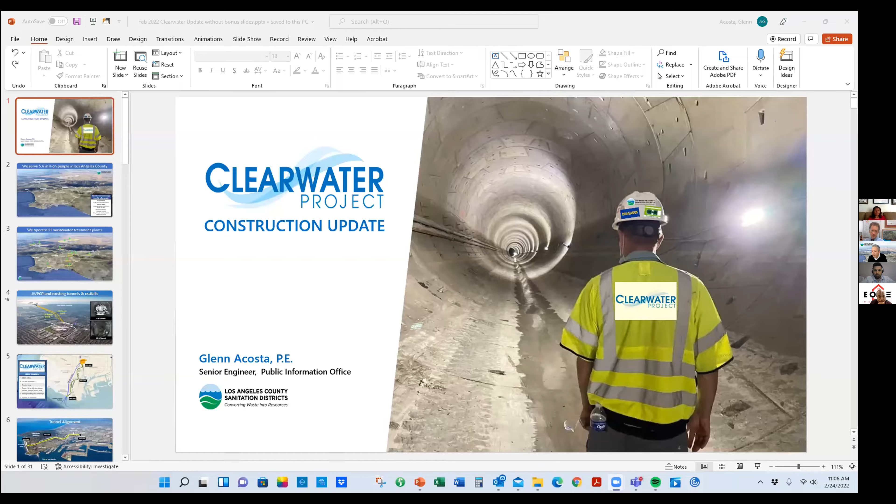Okay, so thank you everyone for having me here today. I'm here to talk about an important infrastructure project. It's the largest construction project that our agency has undertaken in its history, almost 100 years. And it's a very important project for the county. So I thought I would start off with a little bit about who we are, why we're doing the project, and then get into the construction itself and where we are.

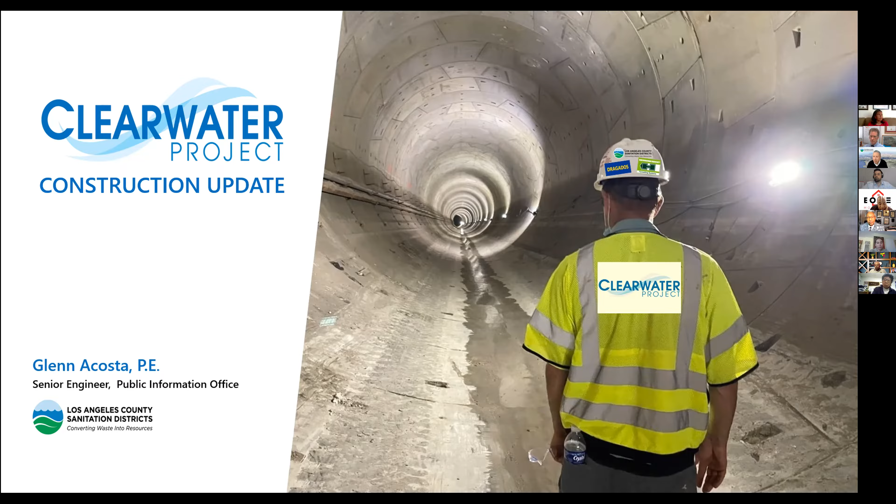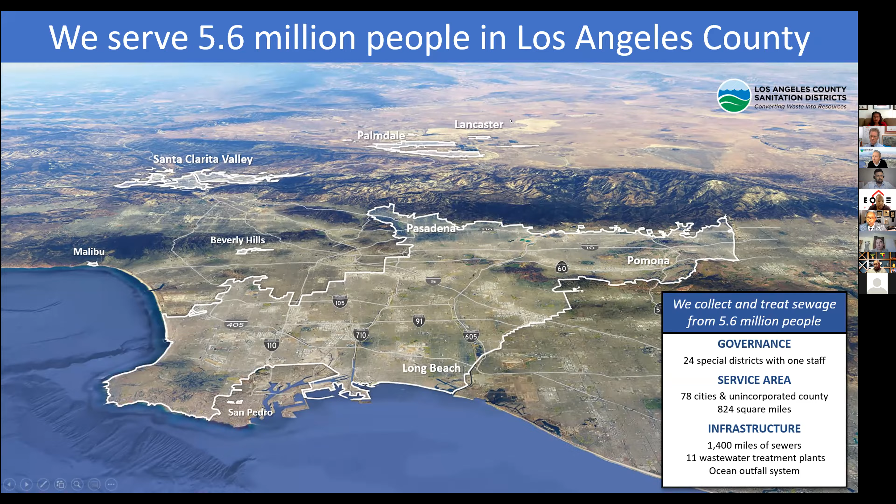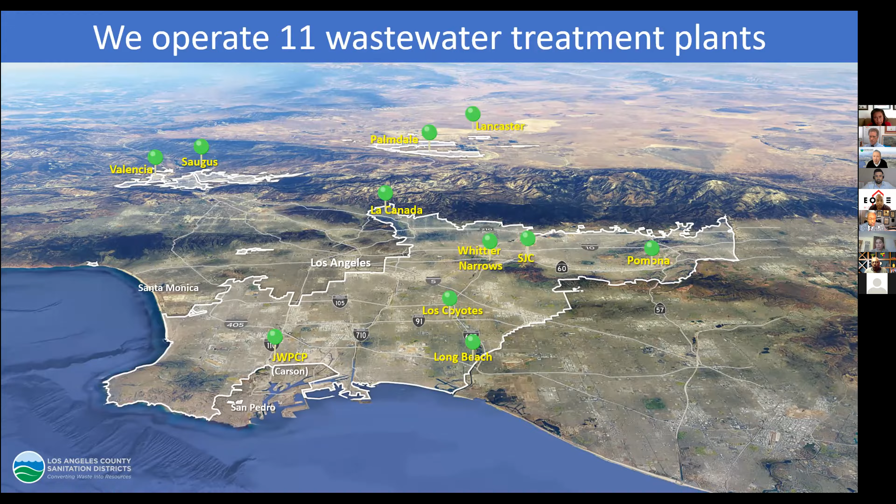So our agency, the LA County Sanitation Districts, manages the sewage for over half the population in LA County, 5.6 million people. Our service area goes from the South Bay all the way to the Antelope Valley. We do that by directing the sewage, or what we call wastewater, to our 11 wastewater treatment plants, shown here in the green pins. The largest plant that we have is in Carson, called the Joint Water Pollution Control Plant. It's by the 110 freeway, and it is the hub of the main sewer system that serves the southern half of the county.

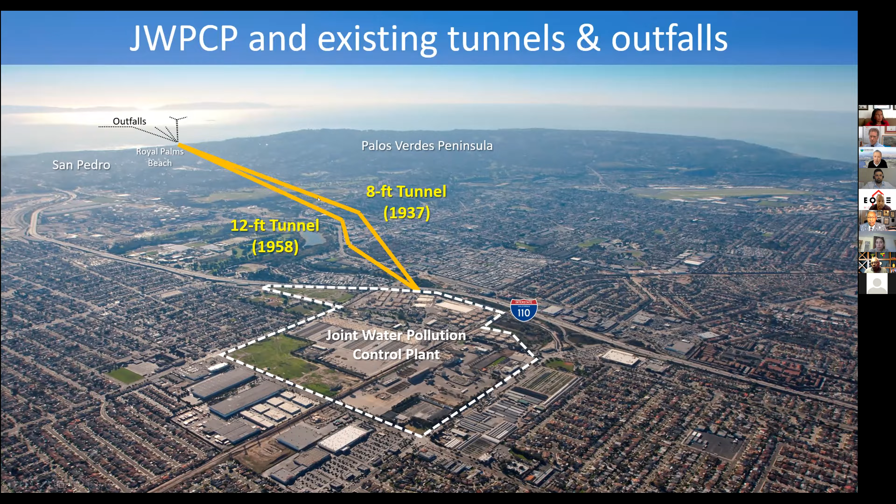Essentially, wastewater comes into the plant, and in less than half a day, it gets turned into clean water, and that clean water goes out to the ocean through 2 tunnels that were built 60 and 80 years ago. And so the Clearwater Project is about addressing this aging infrastructure by building a brand new tunnel.

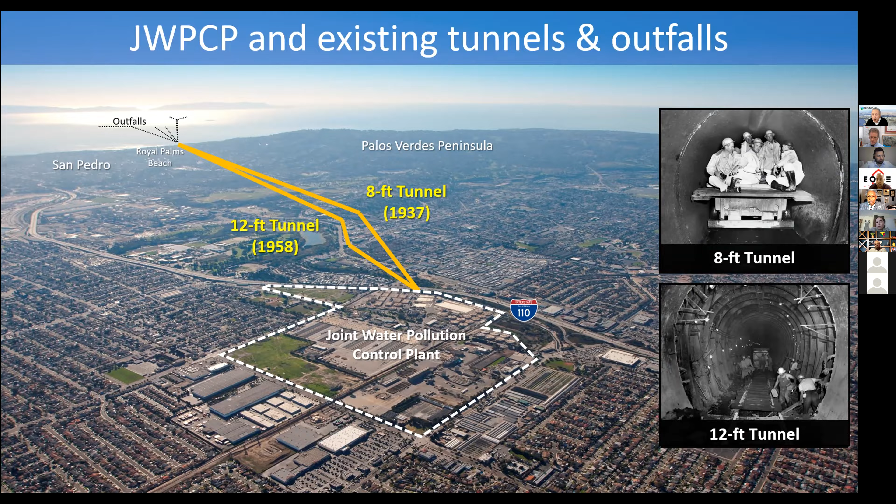If you were to look at the alignment of the existing tunnels shown here in the blue line, it's essentially a straight shot from our plant in Carson to Royal Palms Beach in San Pedro. However, the new tunnel, shown here in the green squiggly line, is not so much that way. It's because when we were doing outreach in the community back in 2006 and beyond, folks in the community wanted us not to go underneath their homes. And so we made the decision to stay underneath the streets and the public right-of-ways. And that's why you see this long squiggly line.

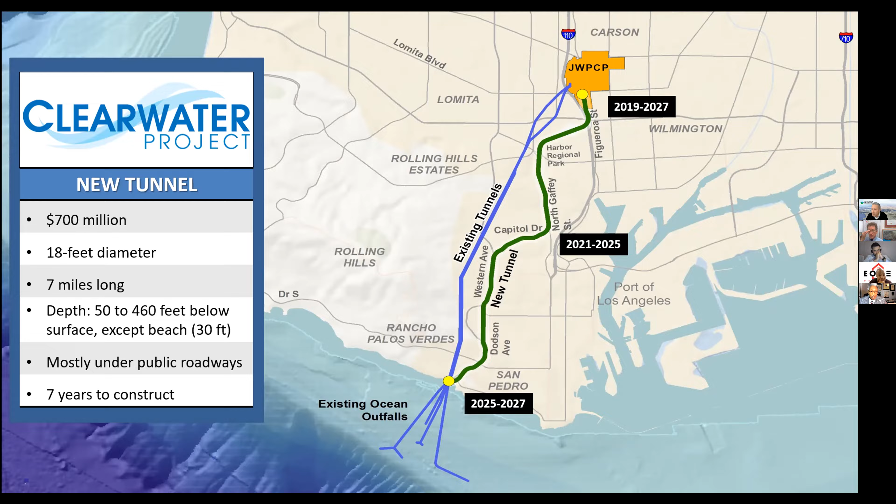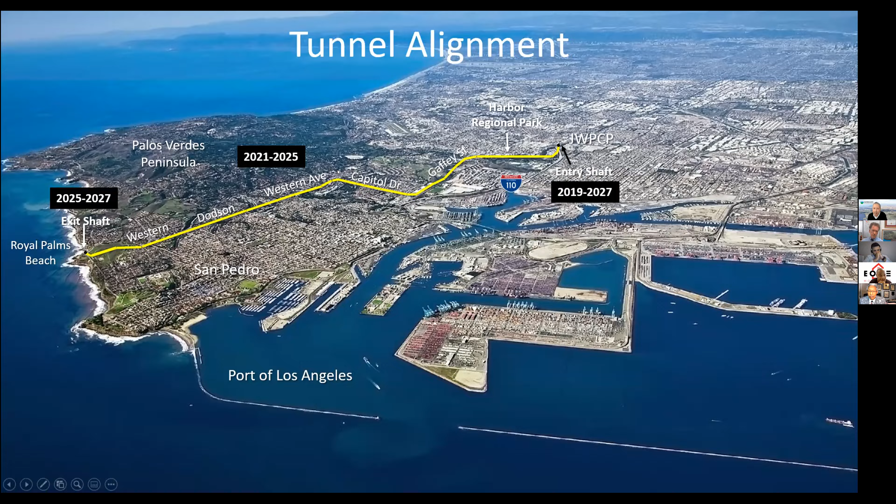So the new tunnel is going to be 7 miles long. It'll be 18 feet as the inside diameter, and it'll take 7 years to build from start to finish. We started construction in 2019. If you were to look at the alignment from an aerial point of view, here it is in the yellow line. We go up underneath Harbor Regional Park, down Gaffey, up Capitol, and then Western, pretty much until we get to the beach.

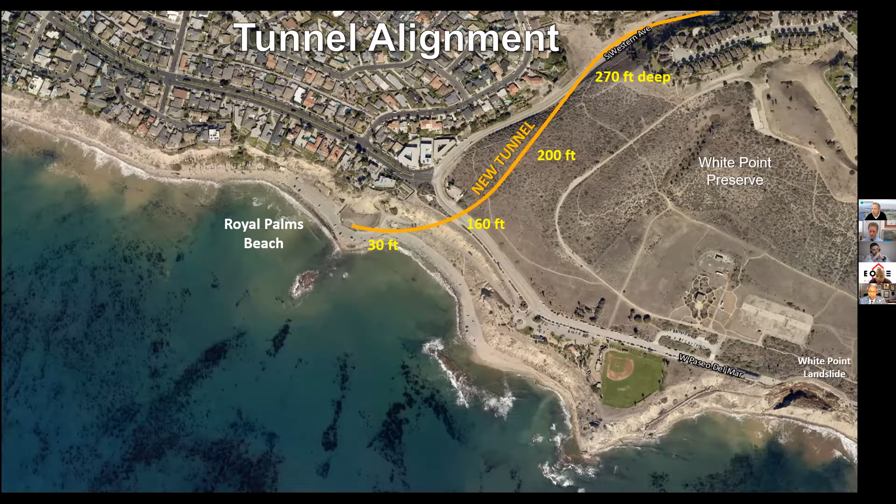And so when we get to the beach, we will be beneath the White Point Preserve, and then we're going to go underneath the bluff, and we'll be 30 feet below the surface. And there we're going to connect to this underground structure that we have right now.

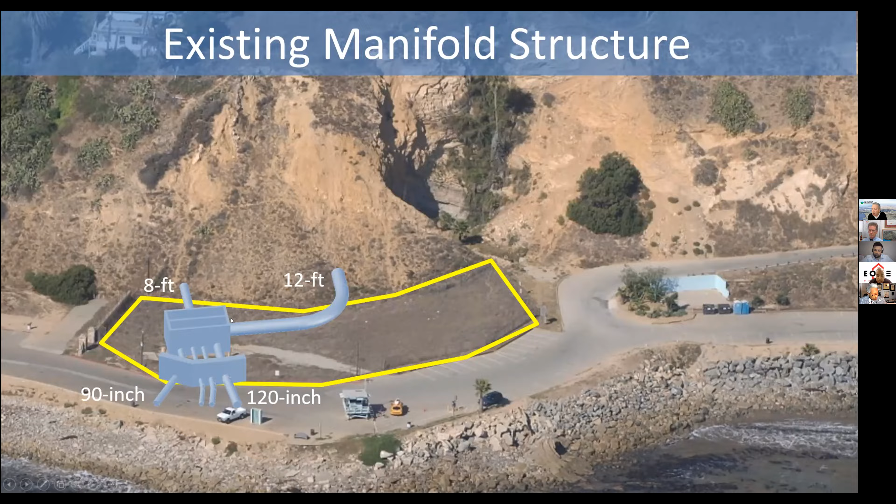It's called a manifold structure. And so we're going to connect to this structure. So this manifold structure right now connects to 2 old tunnels, and it directs the flow to our ocean outfalls. And we have 4 ocean outfalls that follow the bottom of the ocean.

And they're essentially like a large pipe, where at the end of the pipe, you have these holes or ports, and that's where the clean water comes out. So they extend about 1.5 miles offshore and about 200 feet below the water surface. Before I back up.

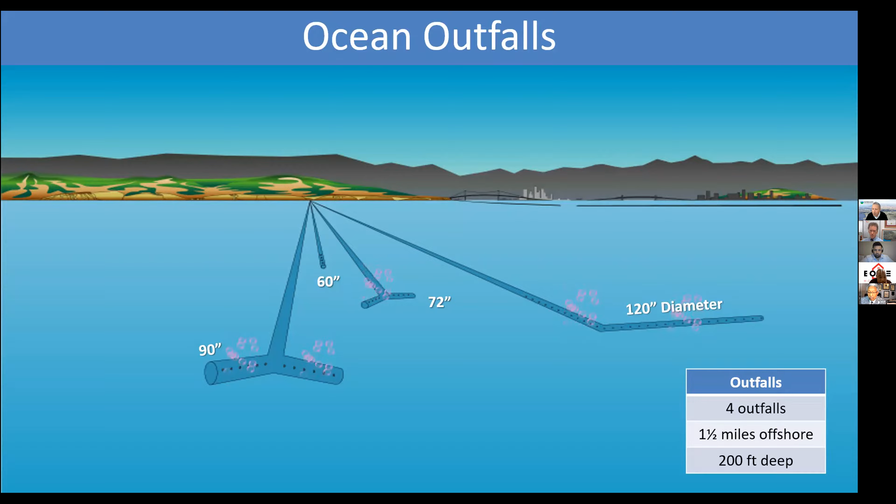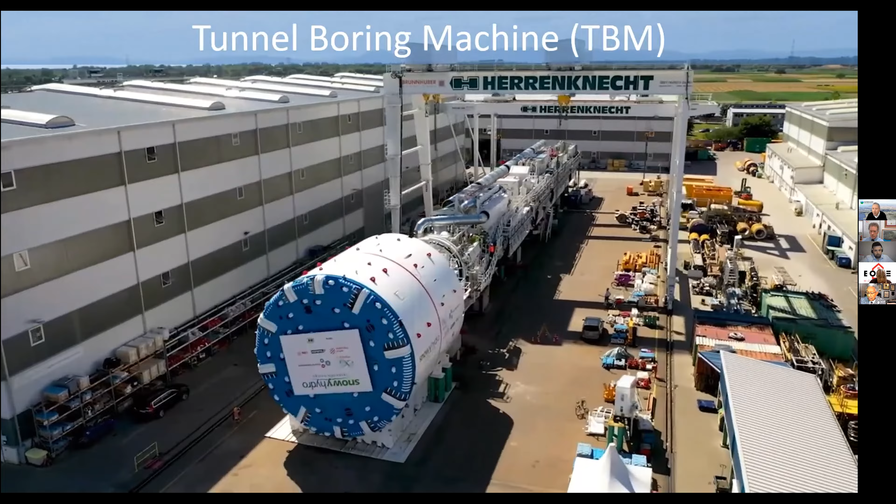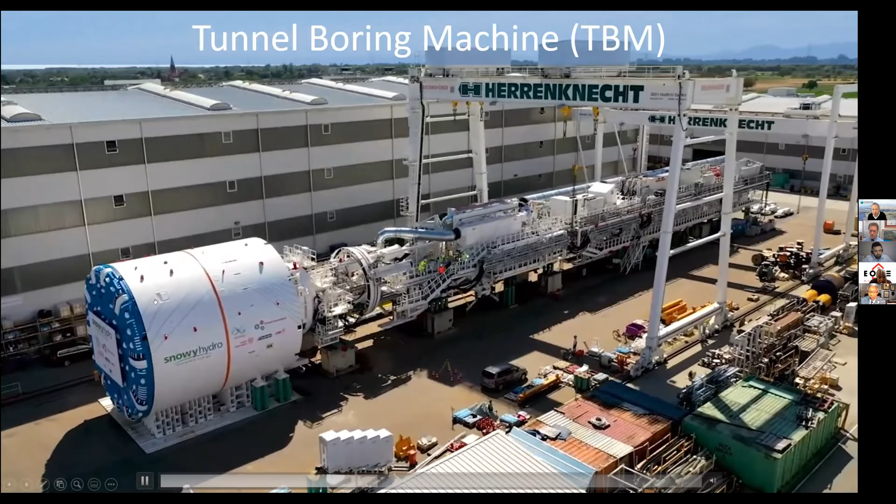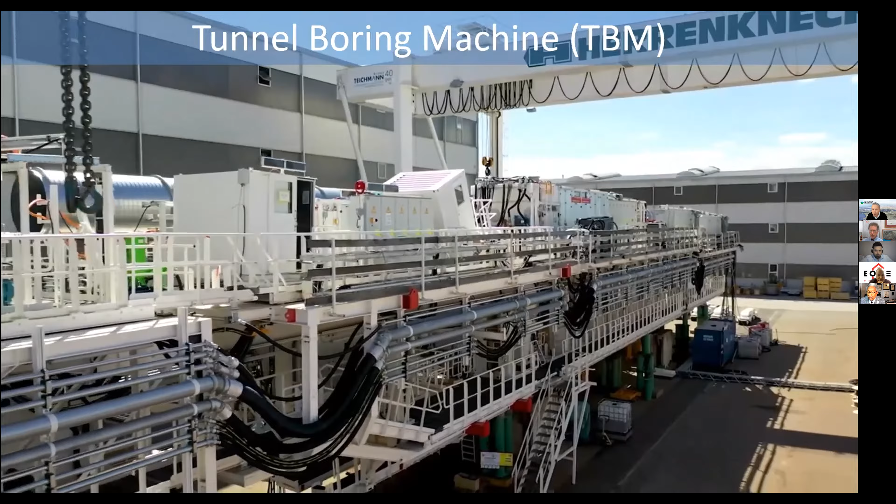And essentially at the front, you have a cutting head that acts like a cheese grater. So it cuts away the rock and soil, and it pushes all that to the back. And attached to this tunneling machine is this long trailing gear. Think of it like a mini city supporting the operation. So pretty much everything you need for the workers to be down there to build the tunnel, that's what we have there. And in our case, this trailing gear is almost 2.5 football fields long.

And right behind the front is an area called the articulating arm, and I'll show you how that works momentarily. So the way this machine works is it goes about 5 feet and it stops. And then we start putting up the walls of the tunnel. And once you complete a ring, it pushes off that ring, goes another 5 feet, and you build some more walls. So essentially this machine builds a tunnel as it digs. And that's one of the beauties of these kinds of machines, because it's very controlled and you're building something as you go.

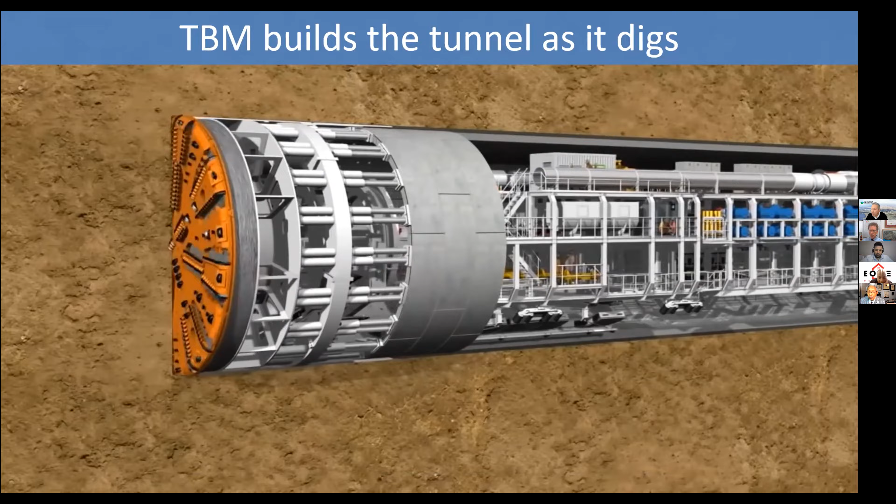So our tunnel boring machine is shown here. It's called Rachel. We had this contest where students across LA County submitted names, and the name that was chosen was Rachel, after Rachel Carson, who was an environmental pioneer that wrote a book many years ago.

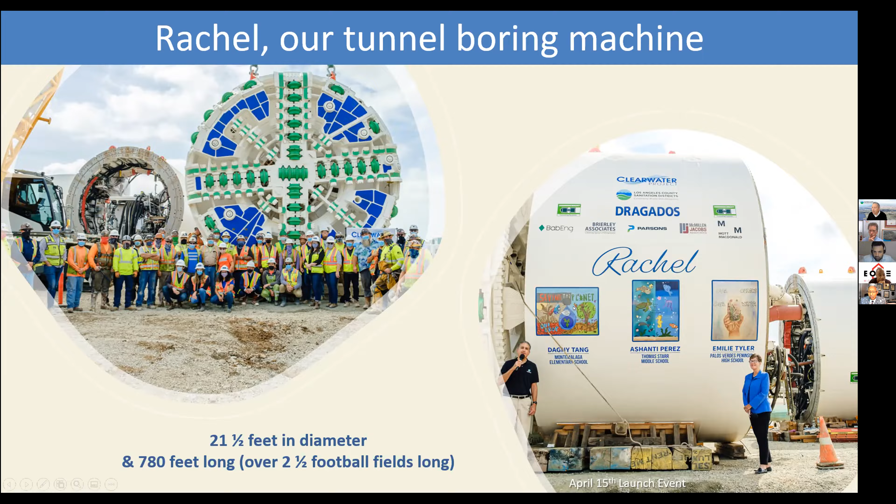And so as you can see, it's a pretty large machine. It's about 2 stories tall, 21.5 feet. And once it's assembled, it's about 2.5 football fields long. We had this ceremony back in April of last year where we revealed the machine to the public. And as you can see on the side, there's artwork there from students who also won a contest for artwork.

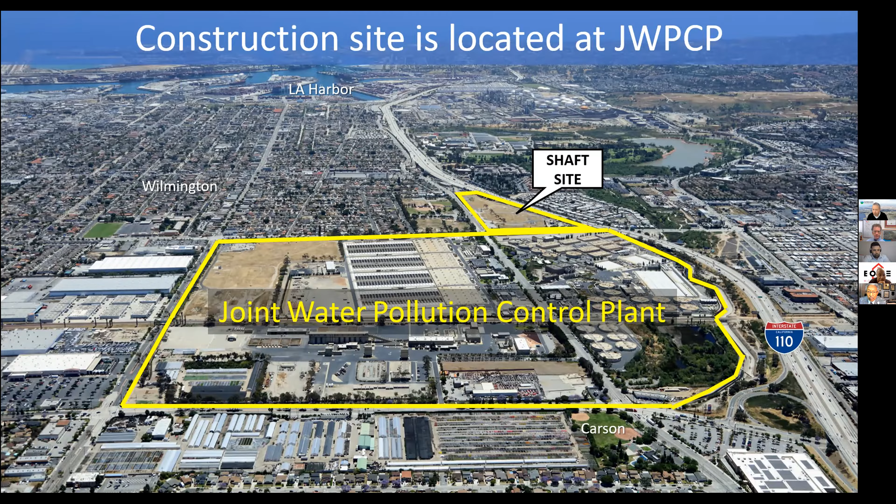So in order to get this machine below ground, we needed to build a shaft. We have this lot that we own next to our plant in Carson by the 110 freeway, and that's where we built a shaft to lower the machine. If you were to fly over that lot back in November of 2020, you would see all the work that was involved in building the shaft.

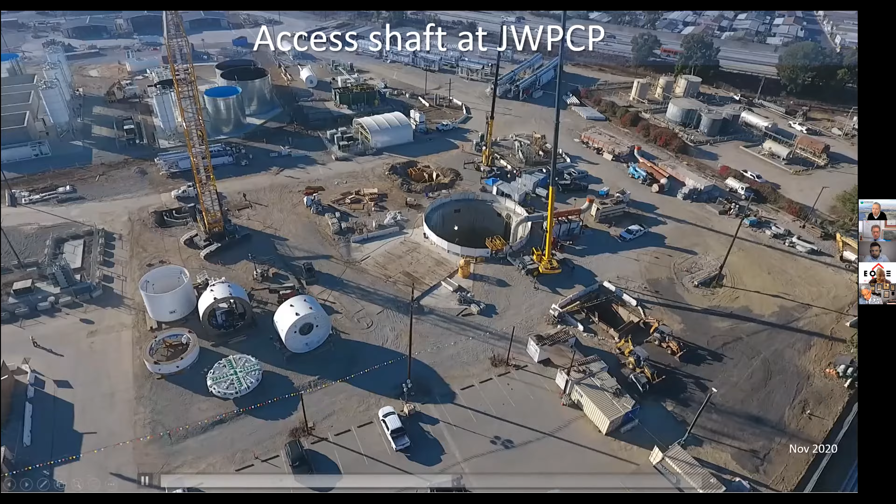This shaft is about 60 feet wide, longer than a school bus, and it's 135 feet deep. So you can stack 3 school buses and it's still not enough. And that's what was built, and it's been done already. The tunnel boring machine, or what we call TBM, arrived in sections. It was built in Germany. It was shipped over by ship and went to the LA harbor. And it took 90 trucks to bring the entire machine from the port all the way down to our lot.

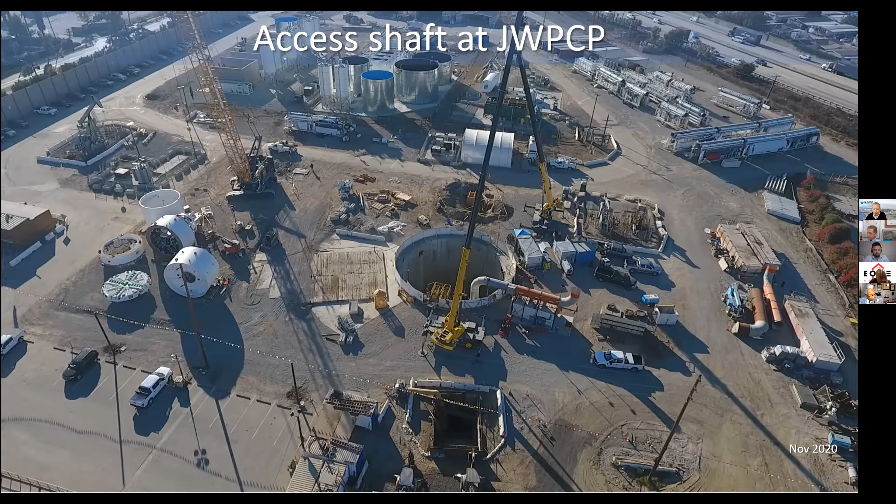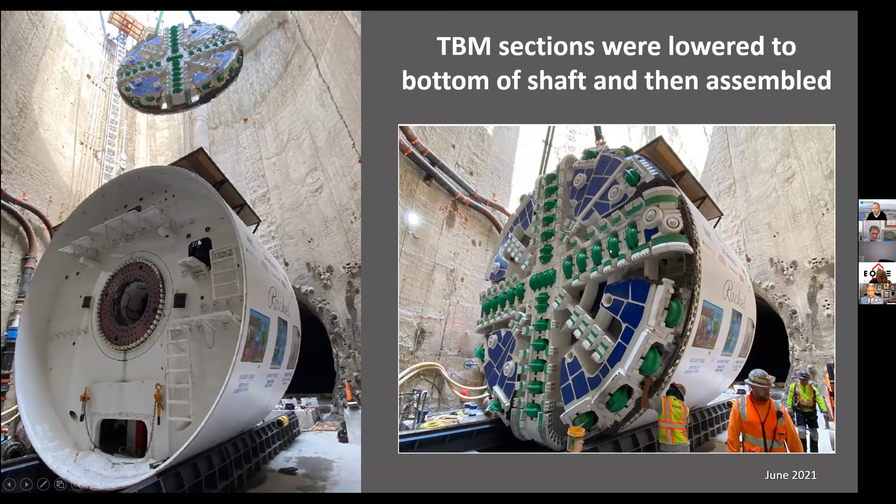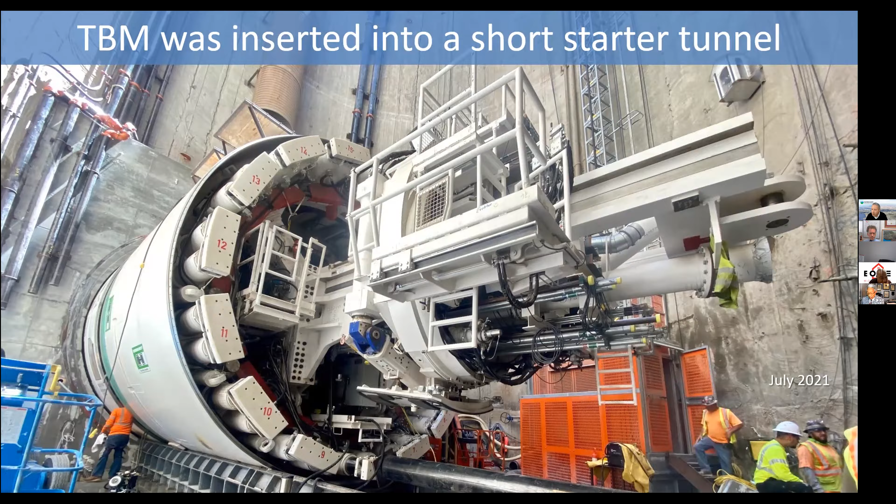So last summer, we began lowering the front section of the tunnel boring machine and started assembling it at the bottom of the shaft. Once the front end was assembled, we inserted it into this short starter tunnel to get ready for tunneling. Once we inserted it, we started testing it, making sure everything was working fine, and then we began tunneling.

Because the trailing gear is over 700 feet long, we had to lower it in sections. Here's a gantry of that being lowered. So as the machine advances, we start adding the trailing gear as it goes.

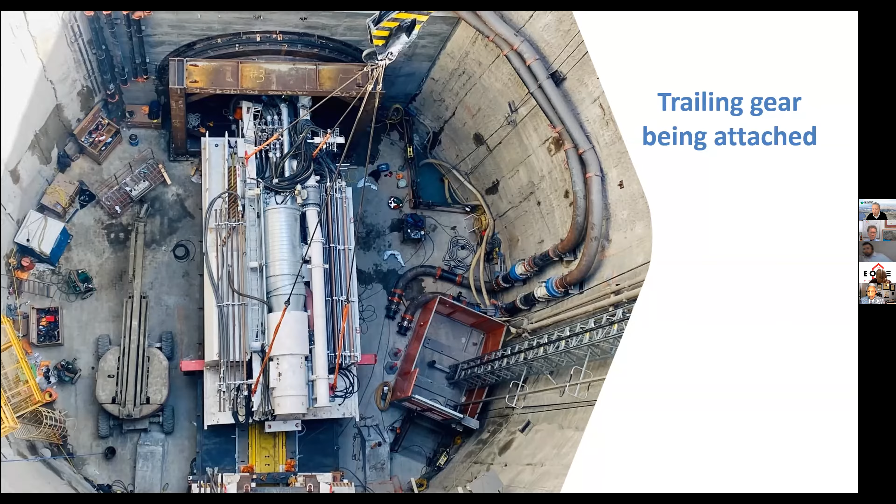So in October of last year, we started building the tunnel, and this is the first few feet of tunnel that were built. And here's the machine. So since then, we've built about 700 feet of tunnel thus far.

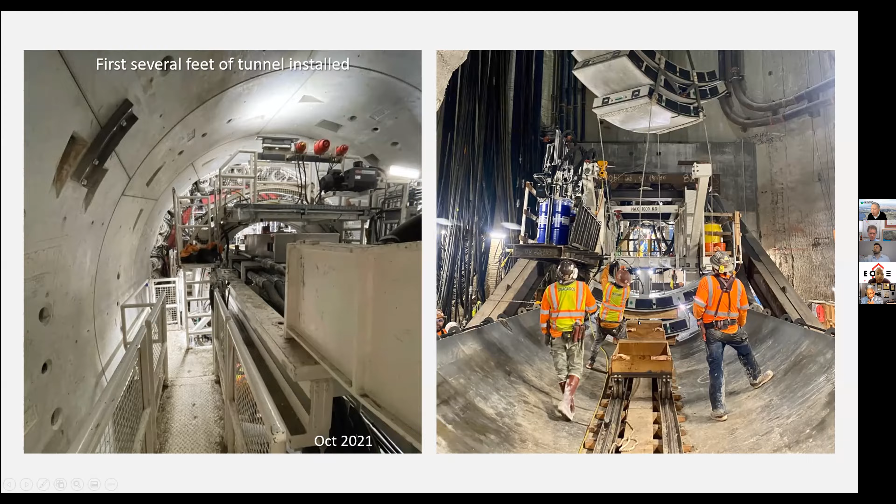And so back then we were lowering the tunnel wall sections below, and they would put the sections on a cart and then take it to the front of the machine. But since we have 7 miles of tunnel, it's not really efficient to have the guys push carts up and down the tunnel, right? So we have this locomotive that we lowered into the shaft. And so that locomotive will be loaded with the wall segments and brought back and forth from the shaft to where the machine is at.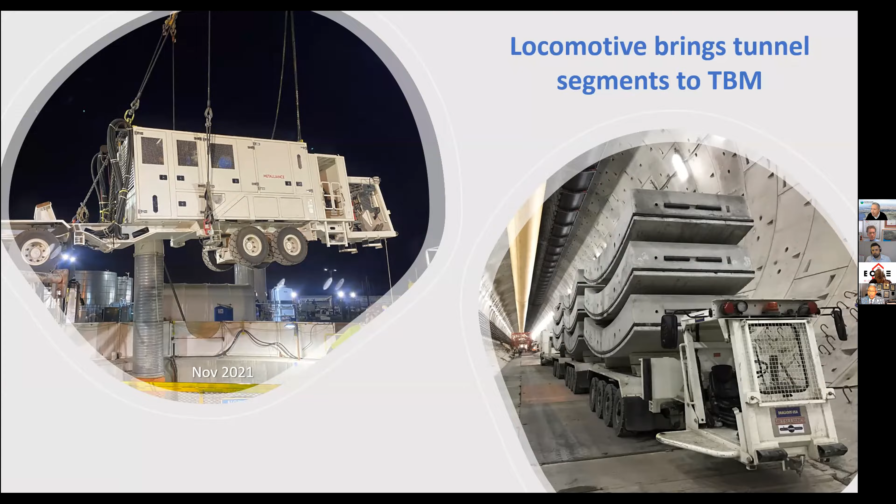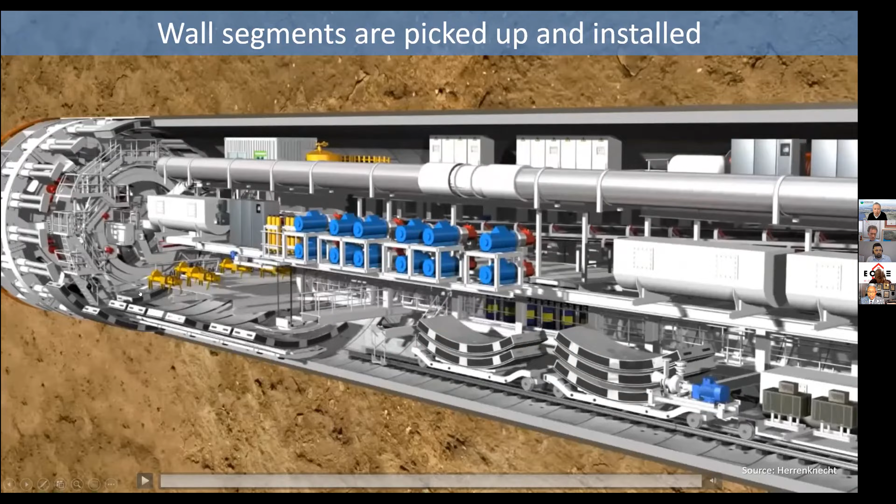And so all the soil that's excavated from tunneling will come out of that shaft in Carson. All the personnel, all the wall segments will go into the same shaft. So what happens is the wall segments are brought forward by the locomotive. It's taken to near the front of the machine. And so the wall segments are put on a feeder, and then that feeder slowly makes its way to the articulating arm. And there's an operator there that picks up the wall segments and puts it up and starts making that ring.

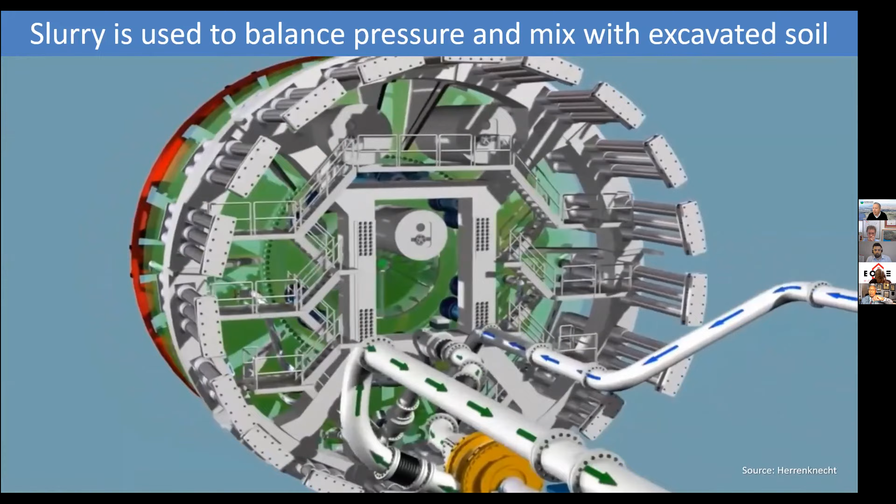So our tunnel boring machine is called a slurry machine because in order to balance the forces that the machine sees underground, we put water and clay or bentonite slurry behind the cutting head. And so that balances the pressure that it sees on the outside. And so that slurry gets pumped in, and then it gets pumped out from the shaft and taken to this slurry treatment plant that we have on site.

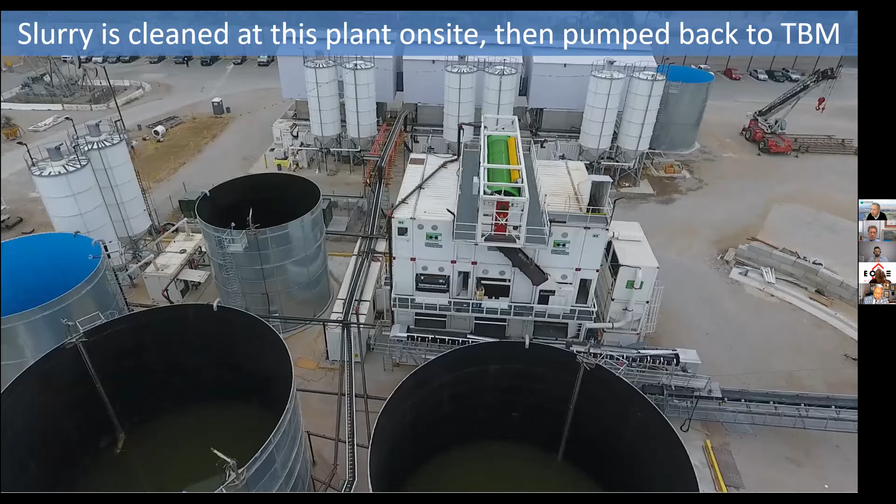And what it does is it cleans up the slurry, removes all the rock and soil, and then it gets recycled back to the machine. So it gets pumped back down the shaft and all the way to where the machine is at. So we're recycling the slurry.

So, we have 7 miles of tunneling. And so you have these cutting discs in the front that cut away the rock and soil. So at some point they wear out. And so they need to be replaced or repaired. So how do you do that when the entire route is beneath the water table?

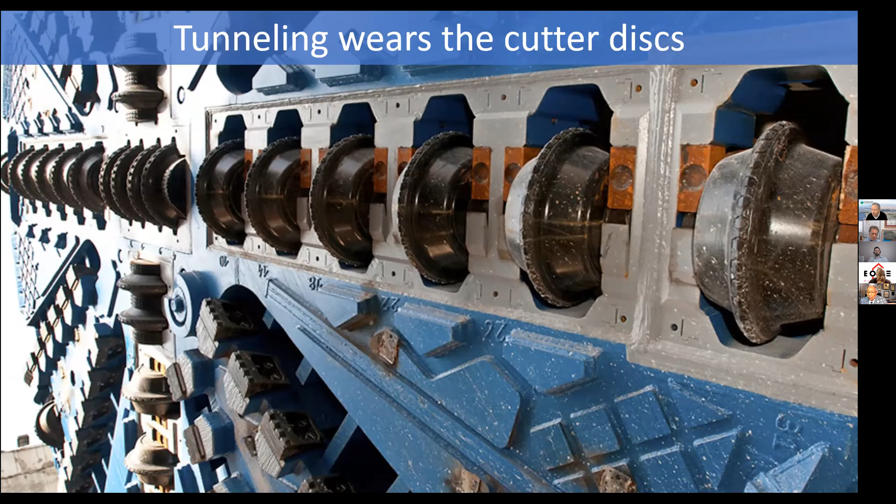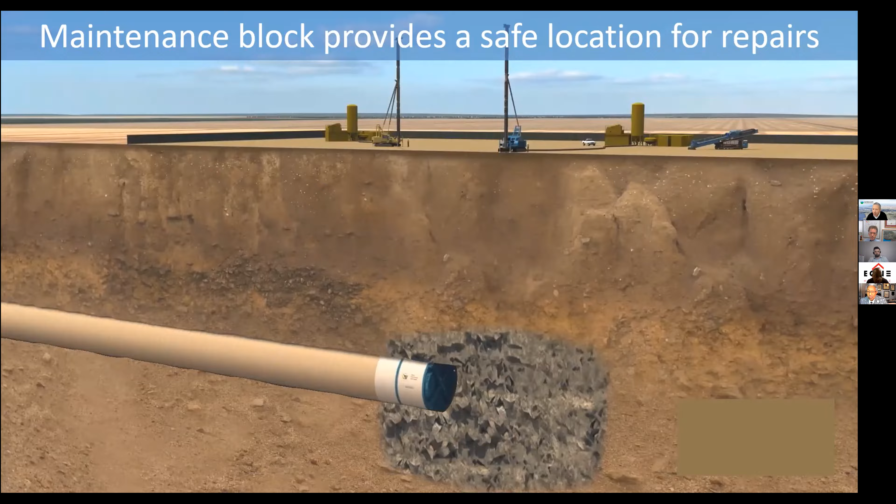Well, what we do is at certain points along the alignment, we inject this concrete grout below ground, and we create this big block of concrete so that when the machine gets there, it bores partway through and it stops. And so now you have a dry, clean environment for the workers to access the disc and make the repairs. And so we built 3 different maintenance blocks, as we call it.

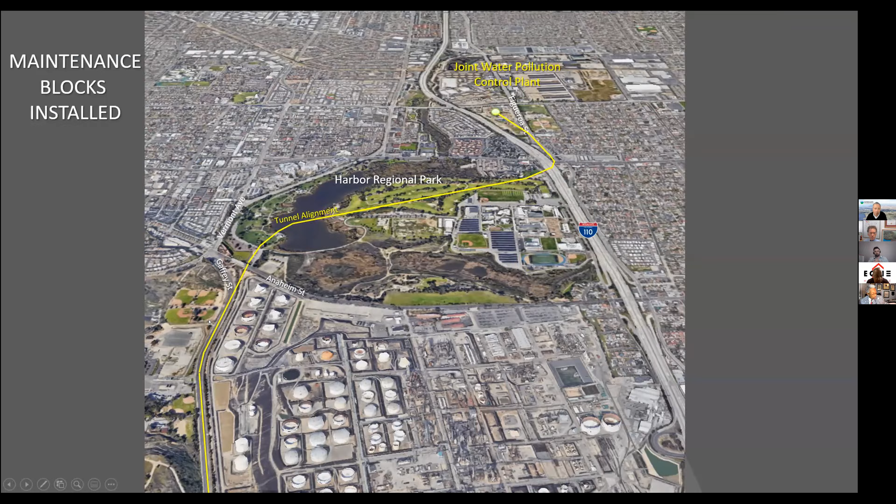And so here the yellow line shows the alignment of the tunnel. And so the first maintenance block is at the north end of Harbor Regional Park. The second block was created at the south end. And the third maintenance block was put in on Gaffey.

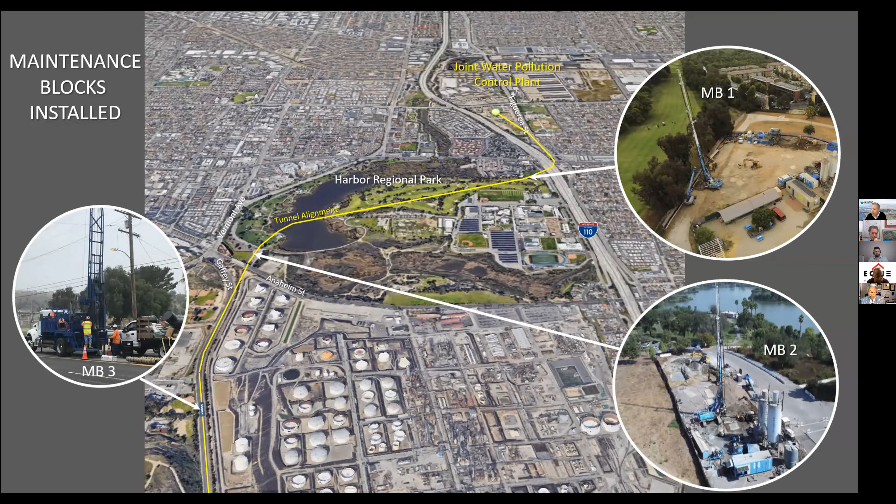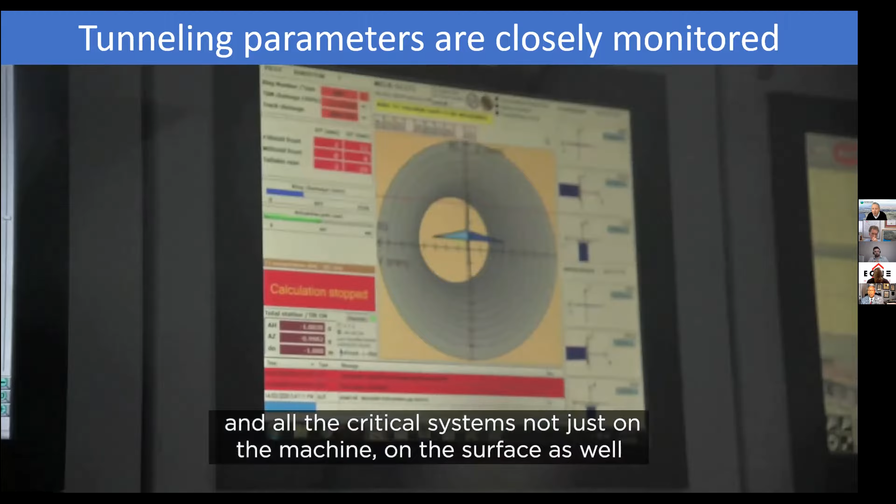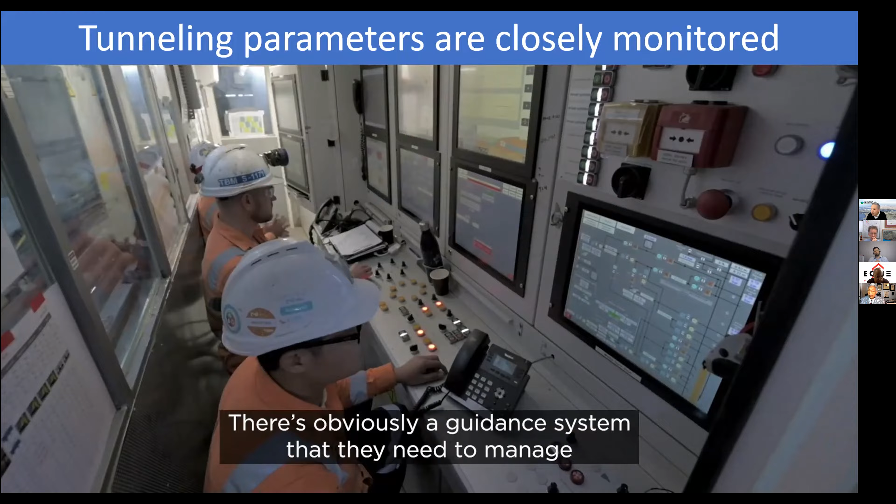So when you go inside one of these tunnel boring machines and you go to the control room, you'll see that pretty much everything that's important to be monitored is monitored. And that basically creates a nice, safe, and controlled way of tunneling. But because we're engineers and we've done tunneling, we have tunneling experts on our team. We also, as an additional safeguard, put in sensors at street level to monitor for any noise or vibration.

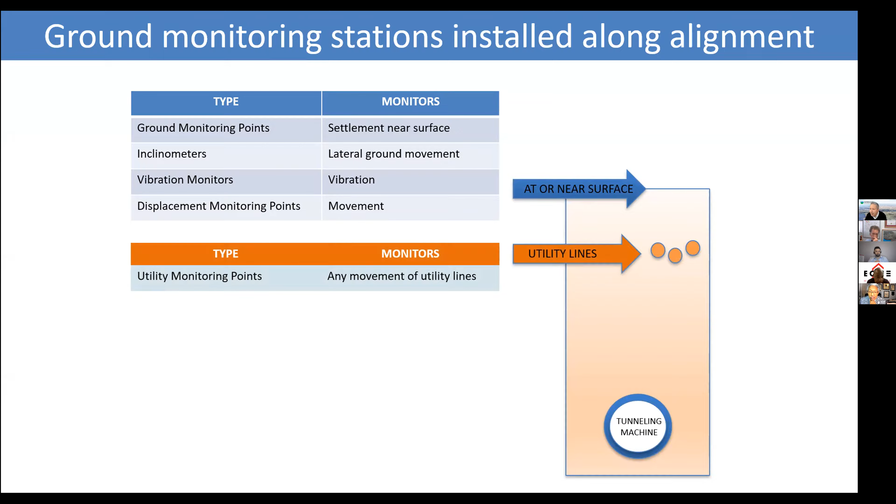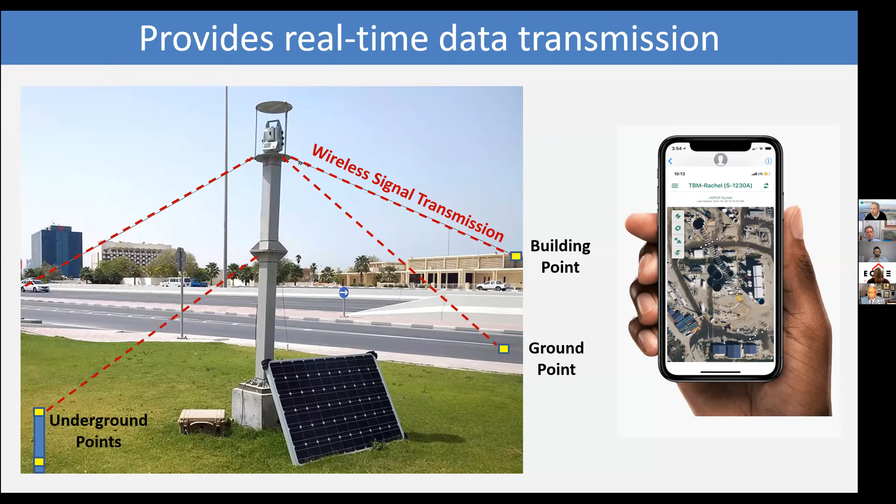And we also have monitors that attach to the gas lines, the water lines, to make sure that they don't move. And we also have sensors that go all the way down to where the machine is at. So all these things are monitored real time. And all these signals are sent to a phone app and the TBM itself, so that you can see real time what's occurring, and you can make any adjustments to the machine that are needed. And so it's a very sophisticated process for building tunnels nowadays.

So we install these sensors, and here's the installation that occurred on Gaffey. And so for the deeper sensors, we use a small drill rig. For the ones near the surface, we can actually vacuum out the pavement and put those sensors in there that way.

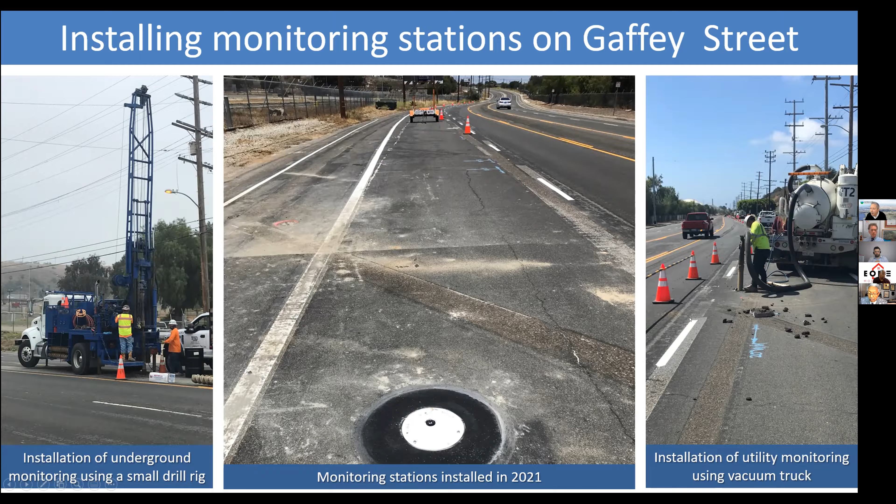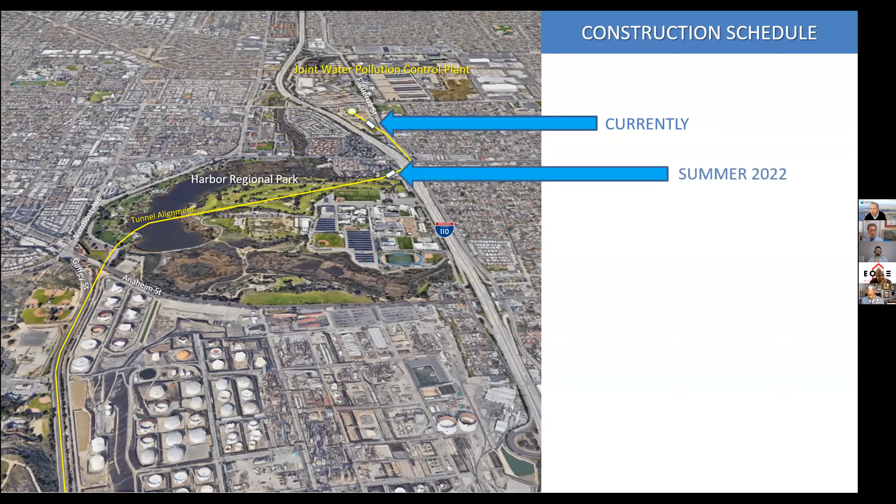So where are we today? So the machine is about to go on Figueroa. And this summer, it should be at the north end of Harbor Regional Park. And by later this year, we should reach the south end of the park.

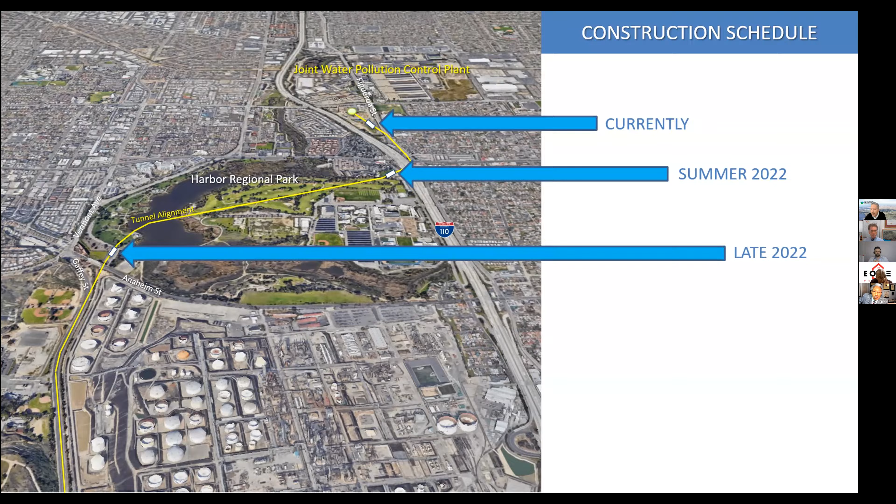So with that, I will answer any questions. Yeah, I'm going to open up the questions, but I'm going to ask one basic question. The total estimated cost of this project is? About $700 million. 700 million? $700 million. That's right, almost $1 billion.

Okay. And in your outreach to the community, I was aware of that, but I didn't go to those meetings. But I think you said your sensors will protect and not interrupt the livelihood and the lifestyle of the people, because you're going deep and you're going around homes and you're going around waterworks. What are your adjustments? This is my question. For earthquakes, we've been having a few earthquakes here. I noticed that the last one was 3.12. How do you, in your construction process, plan around and modify any problems with earthquakes in this area?

So the walls that are put in are pretty thick, and so they're able to withstand movement once they're joined together. And through the earthquake faults, the Palos Verdes fault, we're going to take some additional measures, and we're going to put in a steel liner inside the tunnel. And so even if the outside concrete walls move a little bit, the steel liner inside will keep everything intact. And so it's engineered to today's seismic standards.

Now, items for future discussion that we have. I have a report that I will be planning to bring to our membership and to the community and the business community: an analysis of pending development projects. There's a whole list that the city prepares. We need to look at all of those projects, estimated costs, and what's going on with those. And I have that list. It's in the office, and we'll be having a meeting on that.

I'm closely working on developing meetings with representatives for March with Holly Mitchell's office and their economic development deputy, and also with Barry, give it to me, the other good lady. The LAEDC. Tell them what the LAEDC is. Yeah, the LA County Economic Development Corporation. And so they are the county's economic development support, I will call it, for lack of a better term. And so they've been offering services to the business community for decades, and have been great folks to work with. So we certainly appreciate them.